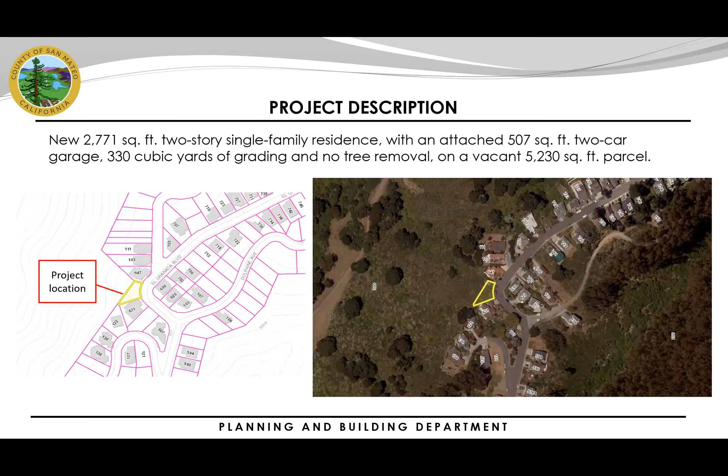Starting with the chronology: the project was received in May 2019. The first Coastside design review meeting was in November, at which time there was a significant amount of opposition to the bulk and mass of the home. And the applicant was asked to decrease the height, which overall would affect the overall height of the home, as well as consider recessing the home into the existing grade.

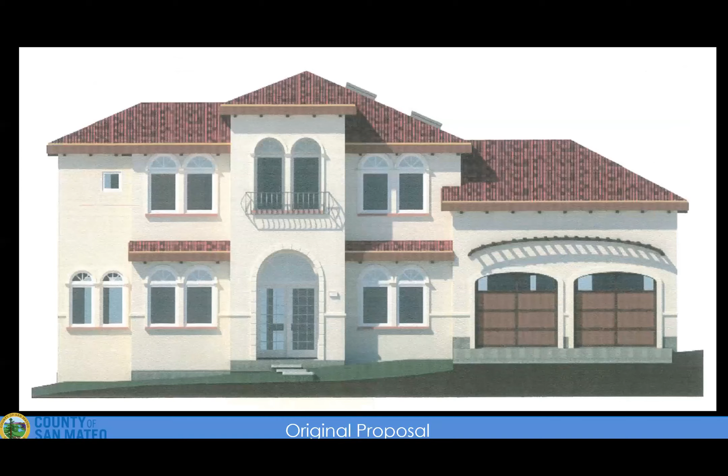This is the rendition of the exterior of the original proposed home. And then this is the revision. So the red outline shows the original roof line, and then it coming down with the interior lowering of the roof and the height of the rooms, and then overall it affected the overall height of the home.

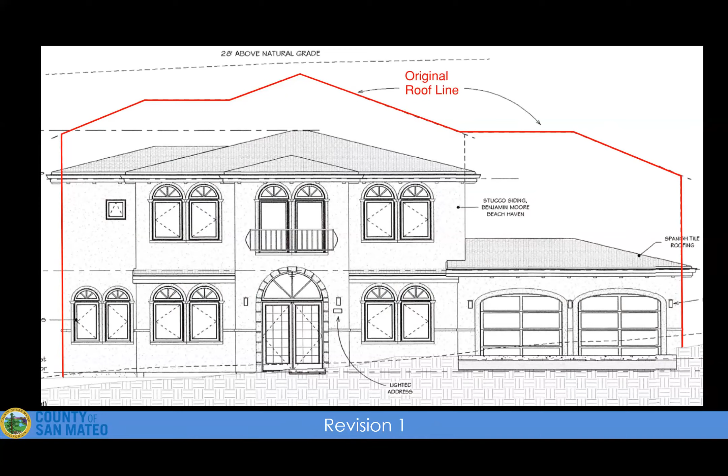This redesign lowering the home, with that rendition, was lowering the home. That also included triggering some minor grading, 330 cubic yards, which was able to lower the home into the grade of the topography.

This redesign was brought back to the Coastside design review in February of 2020. The interested parties were still very concerned about the massing. They didn't feel like it was substantial enough.

The Coastside Design Review Committee asked for the applicant to consider further reducing massing by reducing the front entry door area, which was initially a two-story entry, and then also moving back the second story away, recessed from the front of the first story, which would help reduce bulk.

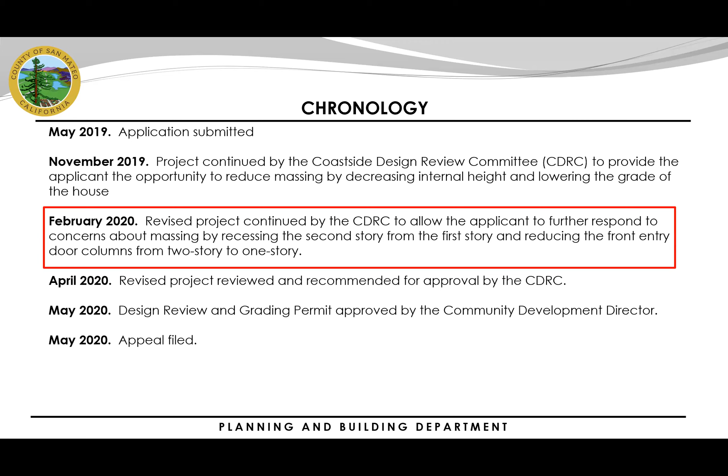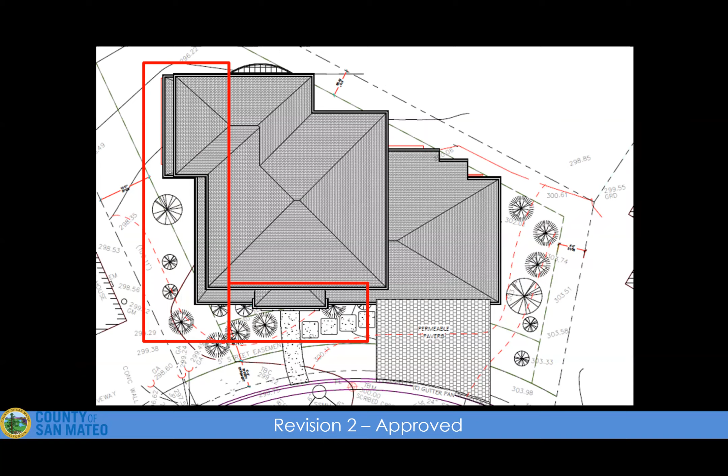This is an aerial view. It shows the changes of where the second story steps back from the first story on the front and left facades. And another showing of the floor plan and the changes.

This second redesign was brought back to the Coastside design review in April of 2020, and it was recommended for approval at that hearing.

It was a recommendation because of the triggering of the grading of the 330 cubic yards that was necessary to lower the house. Thus the decision was then made by staff, the community development director. That approval was issued in May, and then the appeal was subsequently received in May.

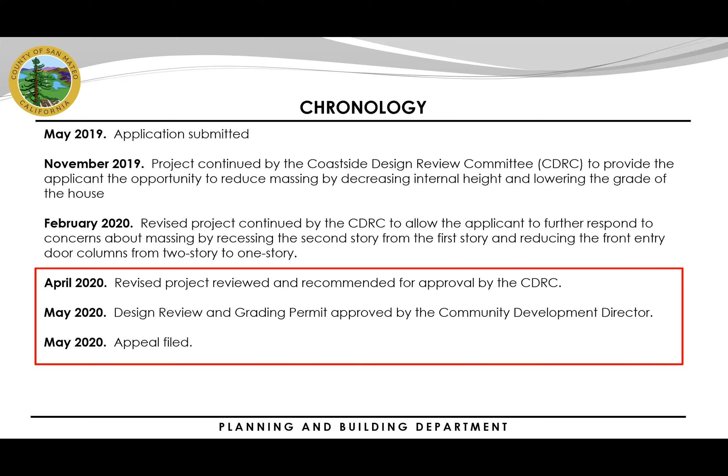For the points of appeal: the first point is that the proposal does not consider natural hazards data, appropriate mitigation measures, and fire policies.

The property and surrounding area is not in an Alquist-Priolo earthquake fault zone or a landslide or liquefaction zone. This was confirmed by both the GIS and also by the geotech consultant's report prepared by Sigma Prime.

The parcel does have competent bedrock, and the design of the residence will be constructed to meet current earthquake resistant standards. The project has been reviewed by geotechnical staff and meets county regulations.

Regarding the fire policies, Coastside Fire Protection District has also reviewed the project and granted conditional approval. Fire conditions have been added to the project, including upgrading the fire hydrant, wired smoke detectors, and automatic fire sprinklers, with a requirement that the property be within 500 feet of the fire hydrant.

The hydrant has to substantiate adequate fire flow and water pressure, and then provide adequate road access.

This is a closer view of the redesigned roof eave that no longer encroaches.

Another point of appeal is that a qualified geotechnical engineer has not been retained for the project. The project includes integrity of the hillside. It compromises the integrity of the hillside, causing sedimentary pollution in nearby waterways.

A licensed engineer can offer and provide geotechnical engineering services. State law allows civil engineers to prepare geotechnical reports. The geotechnical license is an additional license that a civil engineer may choose to obtain, but it does not provide a civil engineer with any additional practicing authority.

Regarding the drainage and the drainage calculations submitted, the plans were prepared by the civil engineer and revised. Subsequently on July 21st it was revised again and also reviewed by county staff, and it is in compliance.

The proposal should comply with general plan policies regarding environmental concerns per General Plan chapters 1 and 2. The submitted biologist report noted that no special status species are documented or likely to occur within the project area.

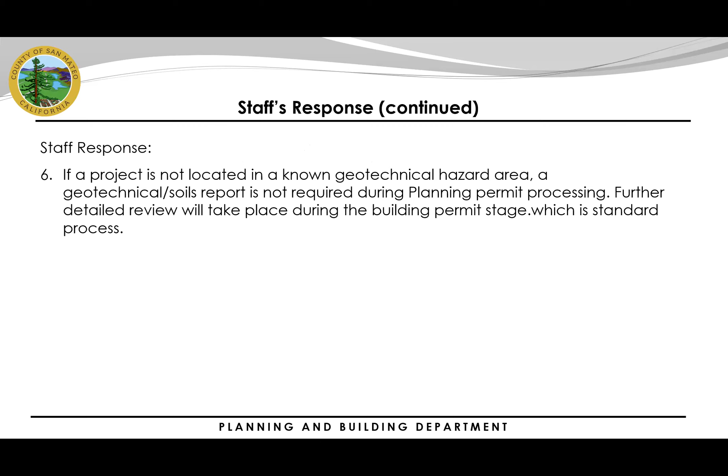I'd like to go over the general compliance. This is in the S17 Development Standards District. It complies with all of the requirements: building site minimum size, side yards, rear yards, building height, lot coverage, and floor area ratio.

There is a unique circumstance, but it's not a variance of any type. The front yard is required to be 20 feet, and you'll see that this is 7.5 feet.

In this scenario, zoning regulations do allow that if the properties on both sides are developed, for the two adjoining properties on each side, there is an allowance outright that the front setback of the proposed building can be an average of those two existing setbacks.

I wanted to show you a visual of that. To the right is the two-story home, and to the left is the single-story home, which is the appellant's property. The measurements of these front setbacks were taken and the average of the two calculated. So the project at 7.5 feet does comply.

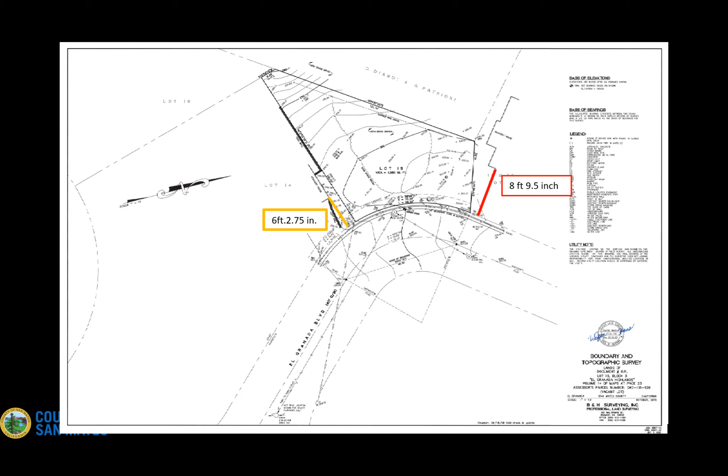Regarding the project's compliance with regulations, it complies with the Local Coastal Program, and it meets the S17 development standards regarding the general plan and grading ordinance. It meets the chapters noted here: soil resources, visual quality, urban land use, water supply, wastewater, natural hazards, and fire hazards.

For the findings and recommendations, it was determined to be in compliance with the design review standards for one-family and two-family residential development in the Mid-Coast. Staff is recommending to the Planning Commission to deny the appeal and uphold the Community Development Director's decision.

That is the end of my presentation. I am available for any questions. I also know that the applicant is present, and I believe the geotechnical soils engineer is present for any detailed geotechnical soils questions.

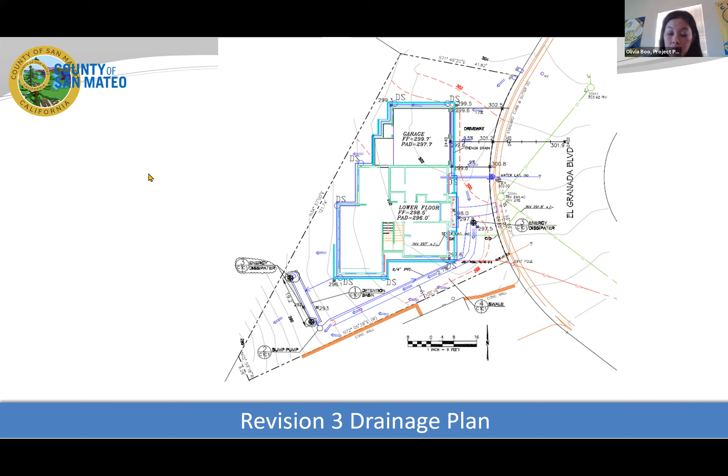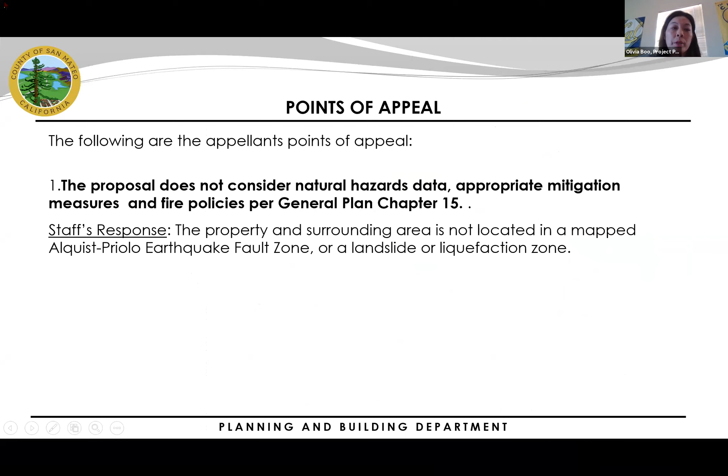Oh, sorry, I went backwards. It's further back. Here, I'm sorry.

So the second last one, which says maximum lot coverage. I'm trying to figure out what this 4,350 square feet number is. Oh, so how that did is we ran a calculation. Let me try and break that down. I think 25% of what? Simply put, there's a limit on the extent to which you can cover a vacant lot, and the limit is 25% of the square footage. So 25% of the entire lot is 4,350 square feet. The proposed project is only covering 15%, so it's 10% less coverage than is allowed as a limit.

Actually, I'm sorry, Steve, I need to correct this. I'm looking up that number. This project is making use of all of what's available. I'm sorry, I apologize, that was a typo. I'm bringing up the original plans. I don't know how that happened. Let's see here.

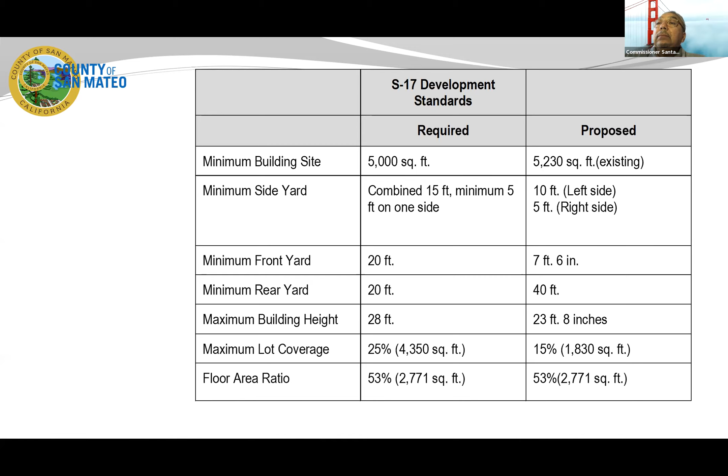Okay, we'll go on to Commissioner Ketchum. Thank you. How are the adjacent homes allowed to have such small front setbacks?

Do we know? I am going to speculate that at the time they were built... I don't recall the history of back when they were built. I don't know exactly when they were built, but sometimes properties do have reduced setbacks, either based on zoning at the time.

Okay, another question is about the story poles. It seems that the standards for story pole materials were ignored, and flimsy pennants were used instead of the sturdy 2-foot wide netting. I'm wondering why this deteriorating situation wasn't addressed before all the pennants flew into the wind. No wonder somebody objected to the concept of story poles.

Yeah, it was an unfortunate situation, and I do believe that in other cases the story poles happen to include small flags attached to them, and the weather obviously did not help in that situation. So they were asked before at the hearing of the design review committee to try and remove that material as quickly as possible, and ultimately the applicant did take care of it. It's been noted that moving further into the future, by discussion with the Coastside Design Review Committee, we'll try our best to make sure that future story poles, when installed, don't include flags.

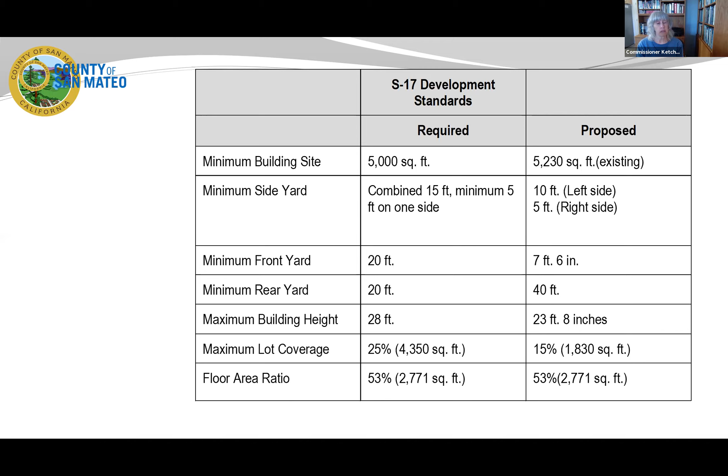Yes, I do. First of all, I just want to say, Olivia, thank you very much for your excellent report and presentation. And it sounds like you may be fighting something, so I hope you clear that up.

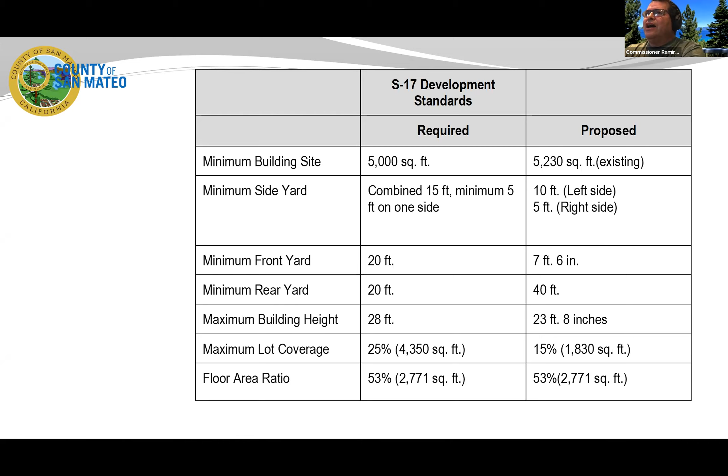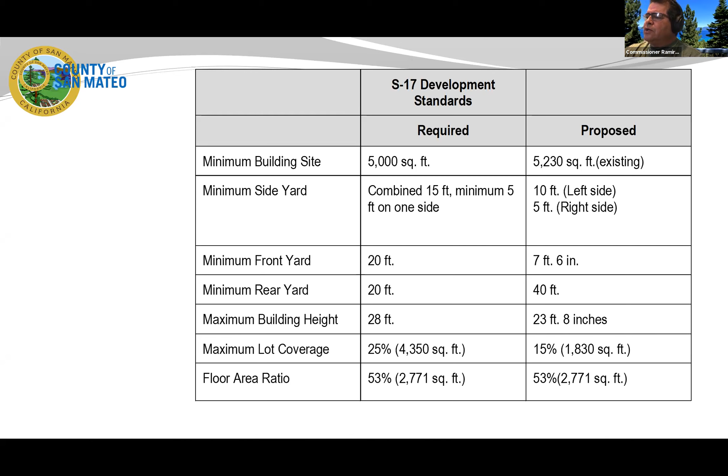My question is, from the aerial plans that you showed, do either side of the houses meet their own side setbacks? It seems like they're a little tight, especially the house on the left.

Offhand, I would have to check that, and it would take a little bit of time, but it could be the case. However, based on not being able to scale it, it's a possibility these homes were built at a time when the regulations may have been different.

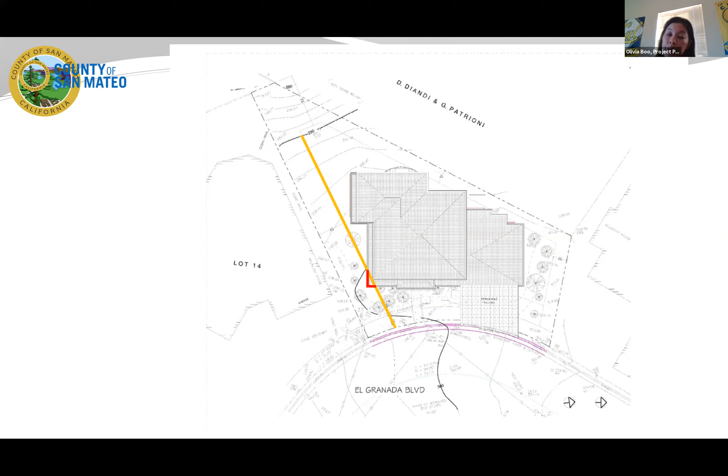If it's decided in favor of them, there is a possibility they would have to reduce or modify the footprint, for two reasons. First, you don't include areas burdened by easements in your total lot area, so since they're at maximum lot coverage, they'd have to go down in size to comply. And the setback would apply to the easement area, so there would be some redesign required.

I think it's important to note that that's just an asserted easement. There is no easement on the books now. Correct. Okay, well, that follows to my next segue question.

For my own understanding, I know we are not making a decision on the litigating case, but what are the odds that this person will actually acquire the easement rights? Can anyone explain the argument this person is bringing up as to how he gains prescriptive rights to this easement? I understand we have no say over that, but for my own understanding, I'd like to know.

I'll start with the simple version and let Tim give the legal support. We deal with this quite a bit in the coastal zone, where the public asserts they've acquired a right to use a certain access way. They acquire that right because they've consistently used it without interference or direct permission from the underlying property owner. So in some cases, the public can acquire the right to use an access route through historical use.

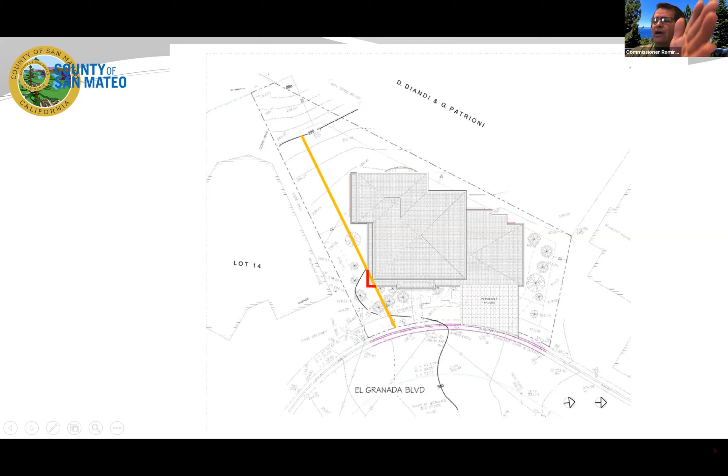Yes, I totally understand that part. Like I stated originally, I know that we are not the ones to decide on anything like this, but I just wanted to understand the odds that this person would actually be able to gain the rights to that, and if there's any chance we'll be revisiting this at a later time, if he was to be successful. But I understand what you're saying. We have an obligation to move forward with whatever is presented before us, based on the rules and regulations we're supposed to decide on.

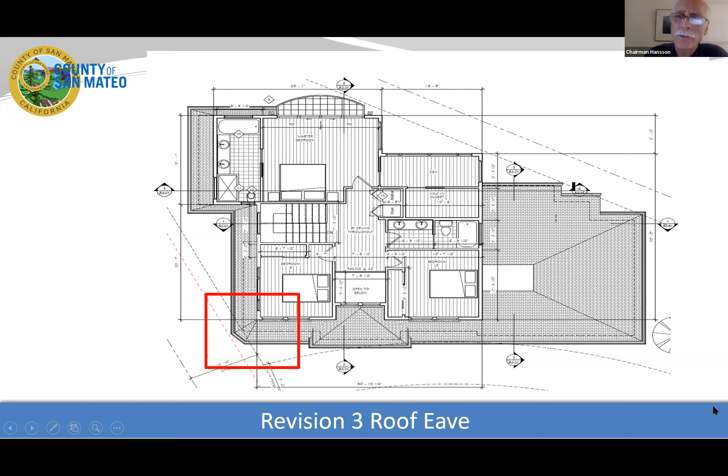So yeah, thanks for the explanation, Mr. Fox. Is that all your questions? Yes, I'm sorry, that is all for me.

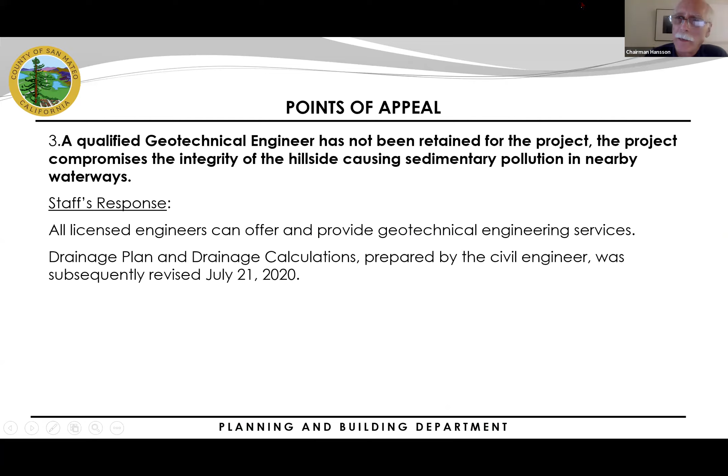Okay, thank you. Unless there's any other follow-up questions, we'll go on to the next part, which is having the appellant party present their case, and they'll follow up. When they're finished, we'll talk to the applicant.

Janet, are you there? Oh, there you go. I'm here. So I do see we have the applicant on the call right now, who is Edward Love. We're going to start with the appellant. Hi, this is Olivia. I don't see anyone else online here outside of the applicant. So do you see, if you go to, I do see a hand raised on the attendee side. I'm wondering if that's someone calling in by a phone number. Let me go ahead and unmute them and see if that is it. Hold on just one second.

For caller ending in 8471, I'm going to go ahead and unmute your mic. Hold on just one second. Hello, can you hear us? It looks like they're still on mute. Hello. Oh, there. Hi, good morning. This is Jeremiah Armstrong. Perfect, thank you. Can you hear me? Yes. I'm actually dialed in on video as well, but I was having audio problems, so I also dialed in via phone. If you'd like to see a video of me, you could go ahead and do that, but you don't need to feel obligated to show a video of me. Whatever you prefer. We could hear you fine. I think, there you go. We can see you. Great, thank you.

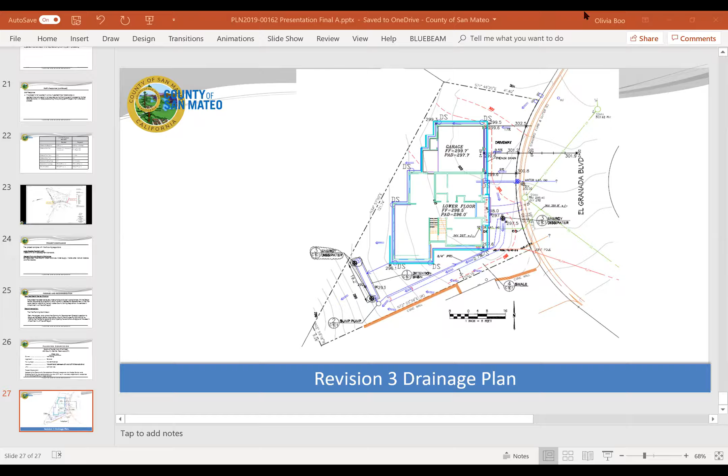Sure, I'm happy to talk about the merits of the easement. My point here was to just try to focus on, regardless of the outcome of the easement, the merits of the project, and I think there are some significant flaws in it, as I addressed.

As with any sort of litigation, I'm hopeful that we can come up with some sort of favorable resolution so that it doesn't prevent Mr. Zhang from building some sort of house on this property.

As to my basis for filing the prescriptive easement complaint, there's significant evidence that the prior owner of my house—I bought this house in February of 2019, the prior owner built this house in approximately 1995, and she and her husband lived here until they passed away—during that time, the residents here used part of that property for a wide variety of landscaping purposes.

And in particular, the mailbox is well over the property line and has been that way. We have significant photographs and also a declaration from another neighbor that it's been that way for well over the 5-year period necessary to establish a prescriptive easement.

So I don't want to make this a total tangent on the litigation, because I don't contest County Counsel's view that the Planning Department and Planning Commission have an obligation to analyze the plans as presented right now, regardless of the outcome of the litigation. But nonetheless, I do believe the litigation is meritorious, though I hope Mr. Zhang and I can reach some sort of resolution to the benefit of both of us.

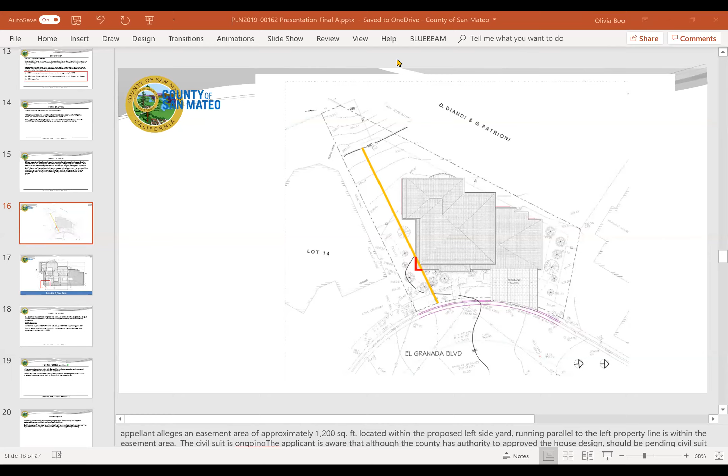Oh, the dishes and the dishwasher are clean. You need to put those away. Unfortunately. Will this work, Ed? Well, do you have the survey? Let me - the survey shows it a little clearer. Yeah, let me check. Okay, thank you.

How's this one? Yeah, that works.

So you can see on the south side of Mr. Zhang's lot, where the property line is - it should be the second page in the plans in the staff report - that the setback at the front of the house is 5 feet, and then there's a concrete retaining wall that goes along the property line and goes back about 45 feet from the side yard. So that's in response to some of the commissioners asking about the side yard setbacks for Mr. Armstrong's house.

As far as the drainage plan is concerned, I believe Mr. Kissick is online and he can speak to that better than I can. But the other thing I'd like to emphasize is that twice we went back to CDRC, and at those meetings the Design Review Committee said technically we can approve this house now, but in view of the concern of the neighborhood, would you please go back and redesign it to reduce the height and reduce the mass, which we did twice.

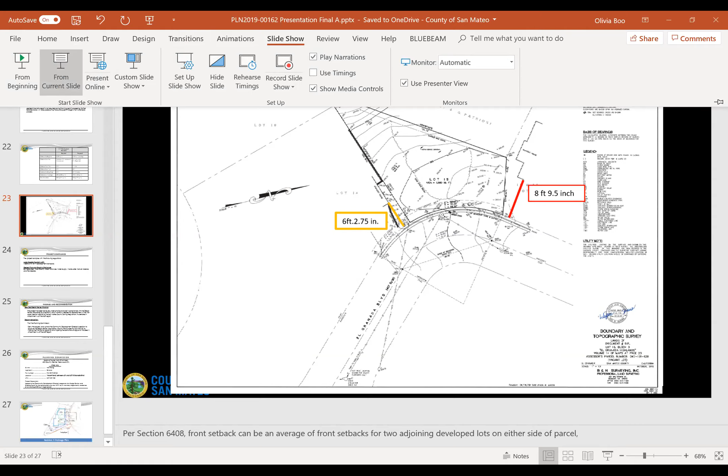And I think that Bruce Chan, who is vice chairman, might also be online, and maybe he can speak to it. I know he did send in an email earlier today regarding that. So those are the main points that I wanted to emphasize, and I will take any questions from the commissioners.

Thank you. We'll start off with Commissioner Ketchum. Do you have any questions for the applicant?

This isn't really a question for the applicant, but since we've been discussing impervious area with both the appellant and the applicant, I just wanted to say, I looked up, so the current zoning requires for impervious surface area, the amount of parcel area covered by impervious structures less than 18 inches in height is limited to 10% of the parcel size. So in this case, that would seem to me, correct me if I'm wrong, that the lot coverage for the house is 35%, and then you can have an additional 10% of impervious structures - non-porous driveways, decks, swimming pools, stuff. So that still, it's 45% would be the maximum that is proposed here for impervious surfaces. Does that sound right?

That sounds exactly right. Thank you. I have no specific questions for the... who are we with now? Oh, the developer. Applicant. Sorry, applicant. Thank you very much. Thank you.

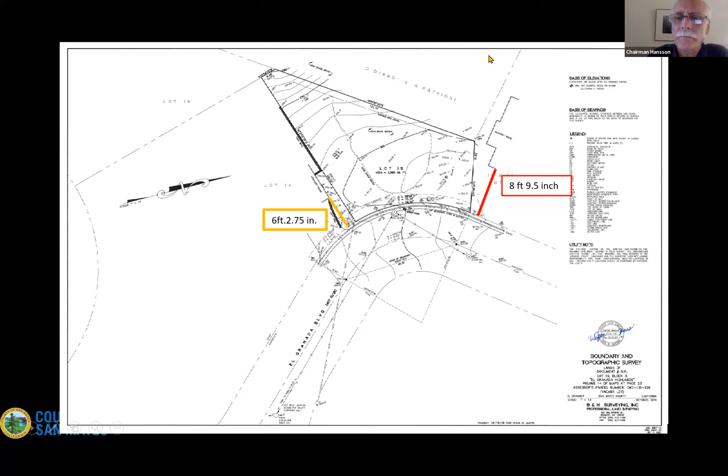Commissioner Ramirez, do you have any questions? No questions. Thanks. Commissioner Gupta, any questions? Not really questions. Loved clarifying some of these numbers that we weren't clear about, so I appreciate that. At this time, I don't have any questions. Commissioner Santa Cruz, any questions? No question at this time.

Thank you very much. Okay, we'll then proceed to the public portion. I'll turn it over to Janet. She'll describe the procedures for this portion. Perfect, thank you. I'm going to go ahead and ask my colleague Angela Montes to guide us through the public portion of the hearing. Angela? Thank you, Janet, and thank you, Chairman Hansson.

We are now taking public comment for item number 1. As a reminder, if you wish to speak on this item, please raise your hand through the Zoom feature. For those joining by phone, please press star 9 to raise your hand. And we had a hand earlier, but I don't see that person on the line anymore. And as of right now, we don't have any hands raised for this item.

You need to unmute, Commissioner Hansson. Thank you very much. We'll wait about a minute here to be sure.